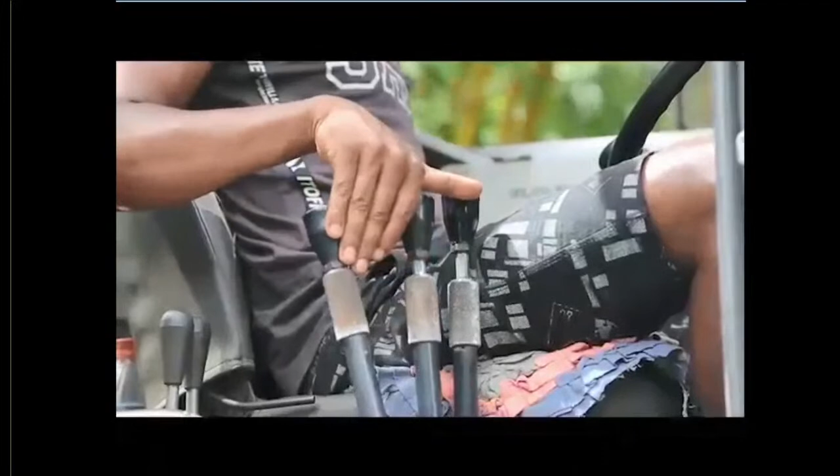This is the concept brought by the Podujana engineers to build a smaller bridge. You will see how the citizens cooperate when they are doing this. When you try to build a bridge you get so many complaints coming from the surrounding people, but these people are very helpful. They are really waiting for the completion of the bridge. These are some of the initial bridges we did.

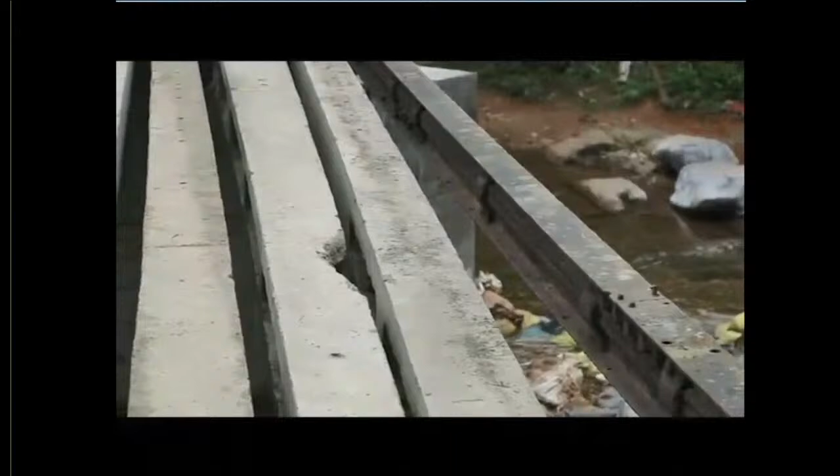So this is the proposal that we carried forward to the government of Sri Lanka. The government of Sri Lanka very happily accepted this idea. But we can only go up to about 200 bridges with this kind of element. Hereafter we should go for a different kind of design.

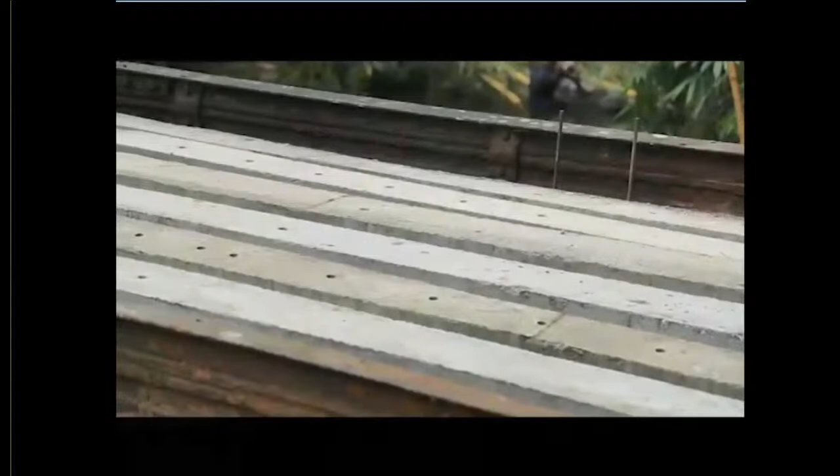It must be easy, convenient, and we don't have many access issues. Maybe modular construction, maybe high performance concrete, we have to have a different scheme. I was happy to be a part of the opening ceremony. This is where this concept was started, so that is the concept that we have developed. Now we are trying to build at least 2,000 bridges this year.

You can see how happy villagers are. Every village that you see, they are very happy to accept this kind of solution, that is one of the main requirements that they have. So I'll go to the next slide then.

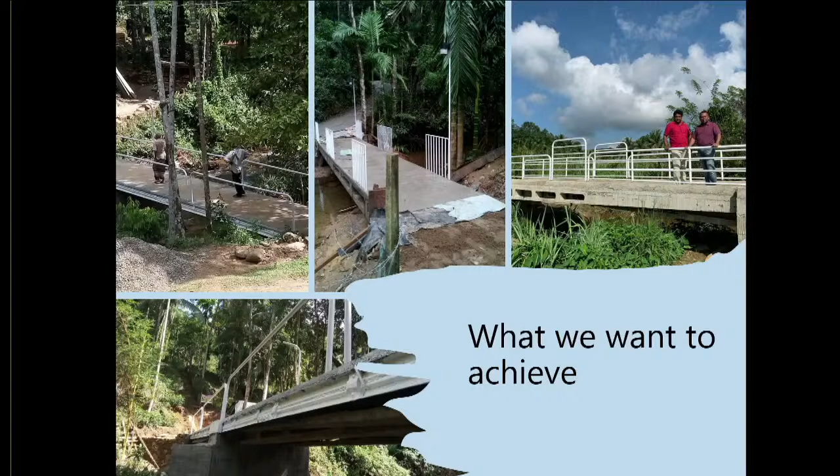So what we wanted to achieve is as much as possible a cheaper, sustainable solution for the business. We engineers always try, without breaking the borders, to apply sustainable solutions to the people who actually need them. So this is what we are trying to do here.

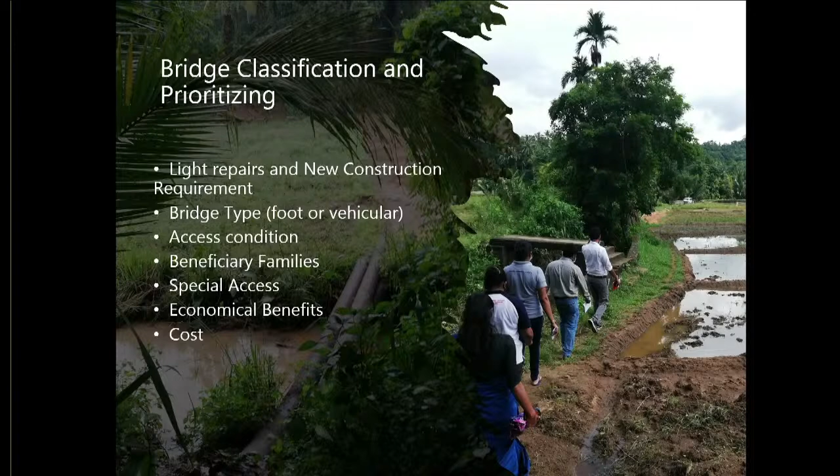In order to start this, we thought we need a mechanism, we need the science there. So we hired consultants from the university and asked them to visit all these places and find the beneficiary families, which is very important, and the economical benefit, which is also important, because we need a return on the investment from the government.

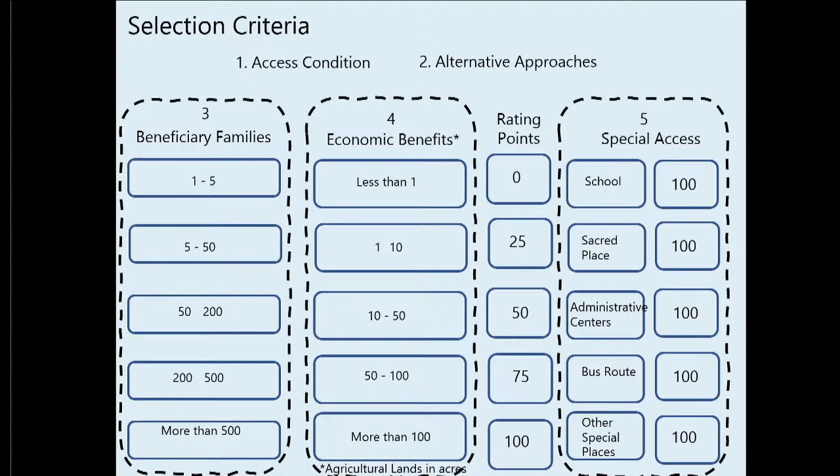Then where special access is required, along with a few other criteria, we come up with new bridges where bridge repairs are needed, and there are some steel bridges abandoned. These places, bridges can be taken away to a different location and another built. Sometimes when you take one bridge away, we can have 6 rural bridges instead. Likewise, different types are there: culvert type, culvert box type, culvert deck type, different types of bridges.

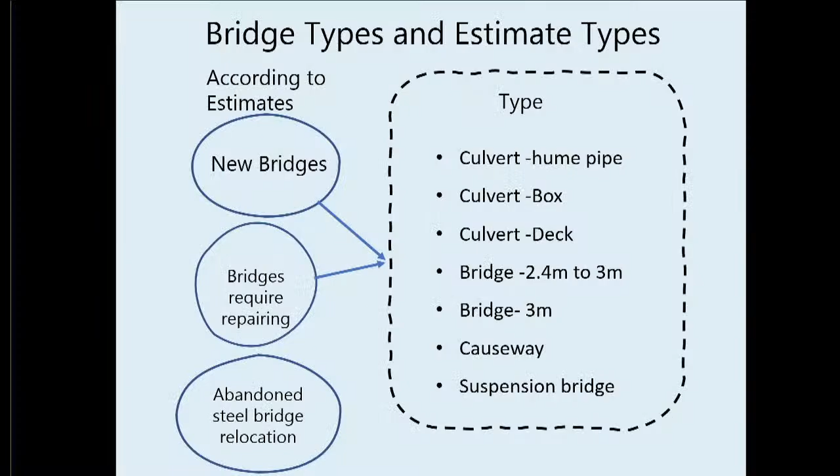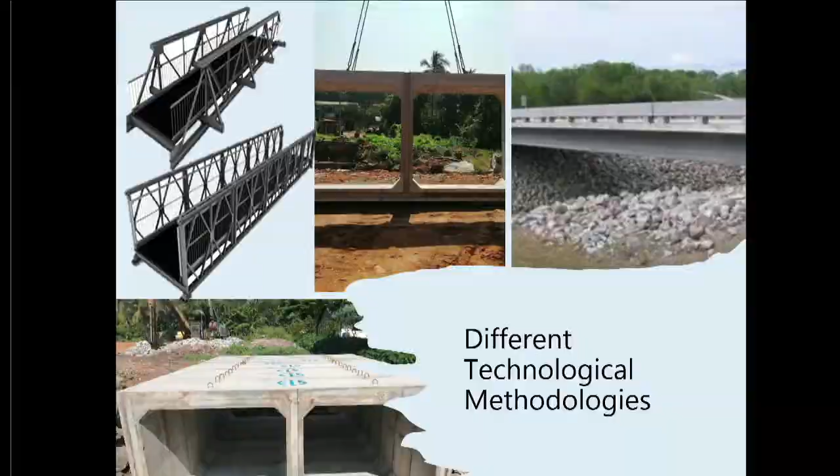So for the time being, we are trying to bring new technology, maybe modular construction, steel, precast units, high performance concrete, and so forth. As well as I mentioned before, we are trying to move all the steel bridges to new locations.

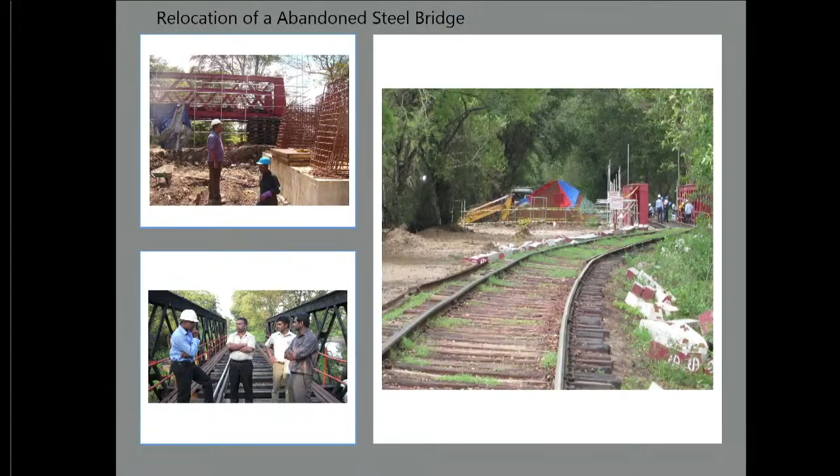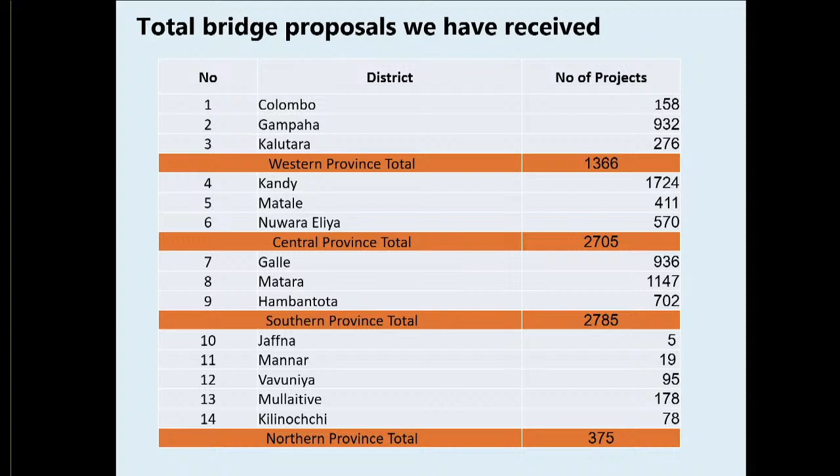For the time being, these are the numbers of bridges that we have received across different provinces and districts and so forth. 13,214 bridges, but we are still receiving more.

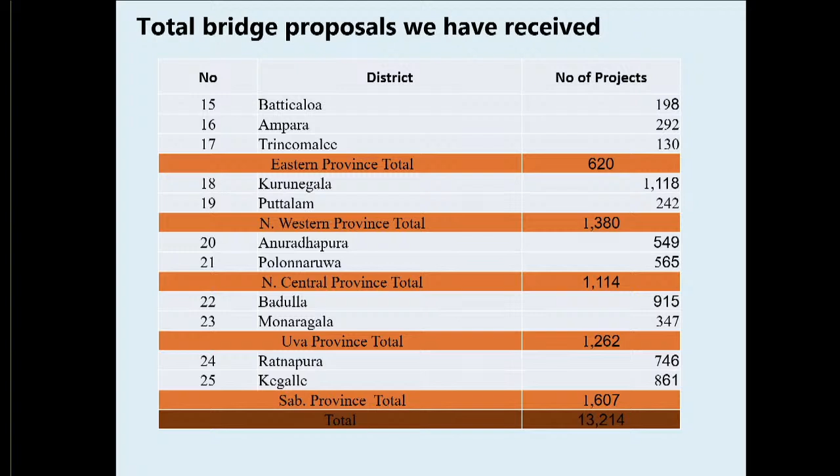So these are when you go province wise. You know that when you go to eastern and northern areas, there is not much river, so there are fewer bridge locations. You can understand that in hilly areas, bridges are more needed, and you get more requests.

So for the inspection study, all the proposals are surveyed and inspected by the University of Peradeniya in a followed manner. Proposal details are sent to the university from our ministry. Proposal sorting was done, connecting with the relevant local authorities, and site visits and inspections, bridge sorting for prioritization, documenting, and presenting to our ministry.

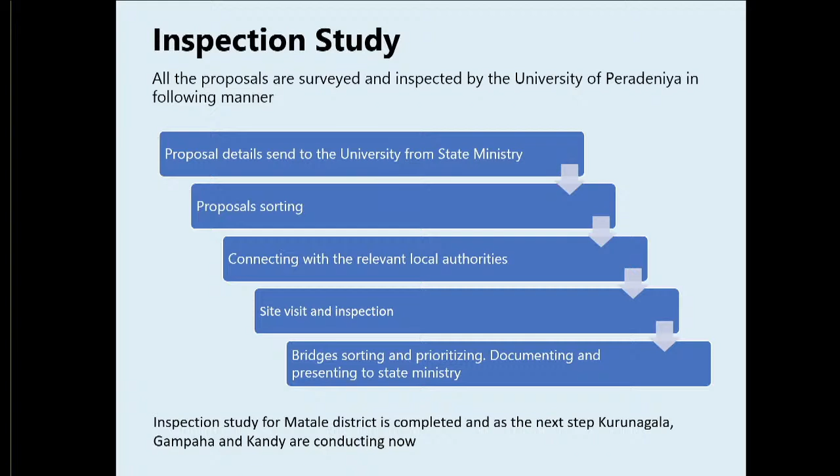The inspection study first started at Matale, because now we also do Kurunegala, Gampaha and Kandy. These are some of the results. What you see in green is immediate importance, then yellow is next, and so forth. There are some locations where, when we checked, they just sent a request for a bridge for one house, and having already a road, they still wanted a bridge close to their home.

So this kind of thing, of course, we can do, but not at the beginning. Later we can do it.

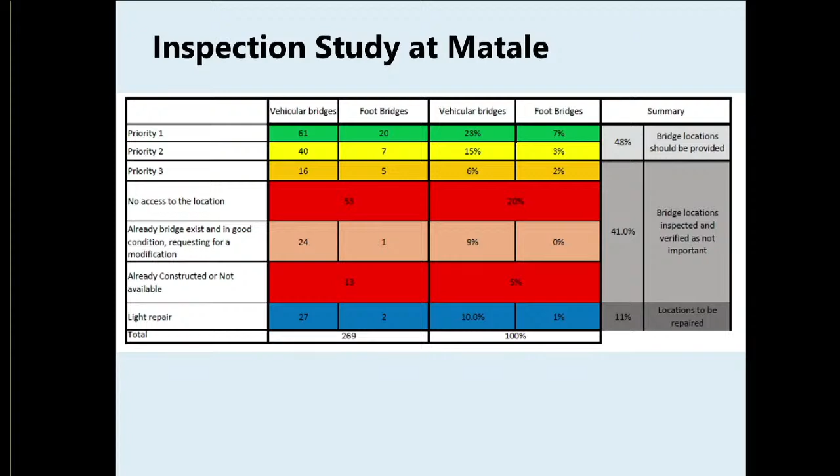Knowing this much number of bridges are to be designed and constructed, we thought of going for a rapid design method. So that rapid design method was formulated. I should thank engineer Weerakoon and his team, he's the person who came up with this.

We trained almost all the RD engineers at the province level, and went up to the province level and trained them thoroughly. This is basically the bridge design and estimation methodology. We can categorize it, but I'm not going into the details.

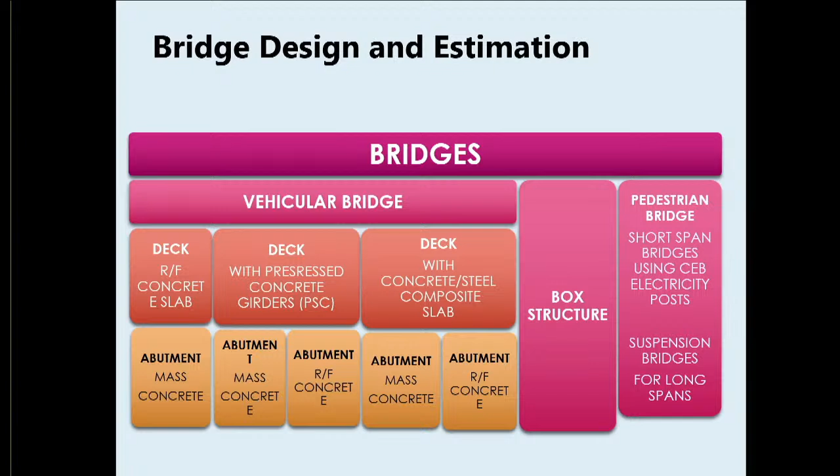So this is the way we have a rapid design solution for any given bridge location. A very comprehensive proposal was established. Now we are around this area, designing the bridges, and estimation is done, and hopefully next month we will be starting the construction.

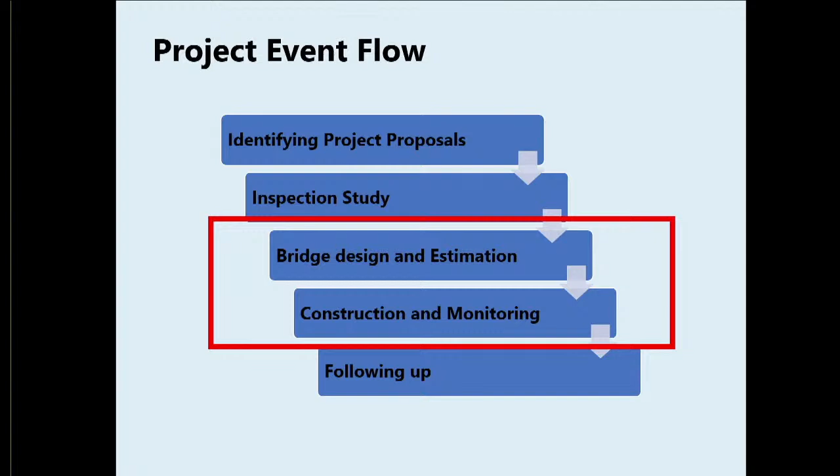With that, I would like to say thank you again for being here with us, and I do hope we will be able to connect this location and give the benefit to the common man. That is our requirement, we need to have the scientific methodology.

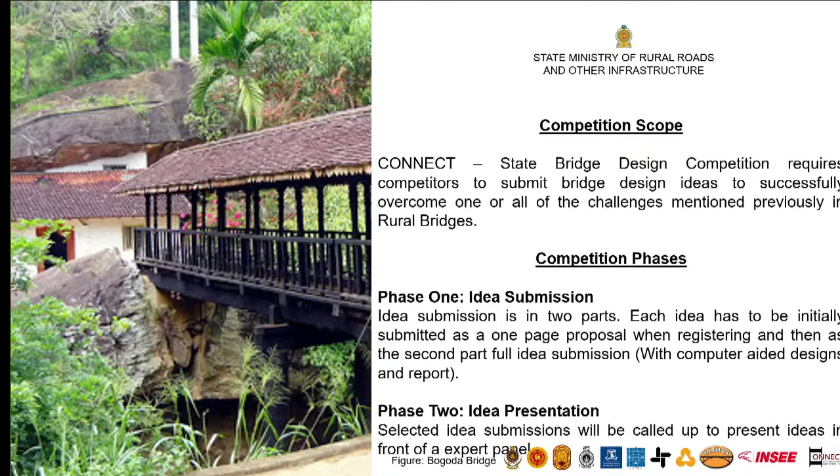We are conducting the competition in 2 phases. Phase 1 is the idea submission phase, starting with the registration process, and after 1 week the competitors have 1 month to complete the design report with structural designs, BOQ estimates, and finally submit the designs. Phase 2 is the idea presentation, where the selected competitors will be called upon to present their ideas.

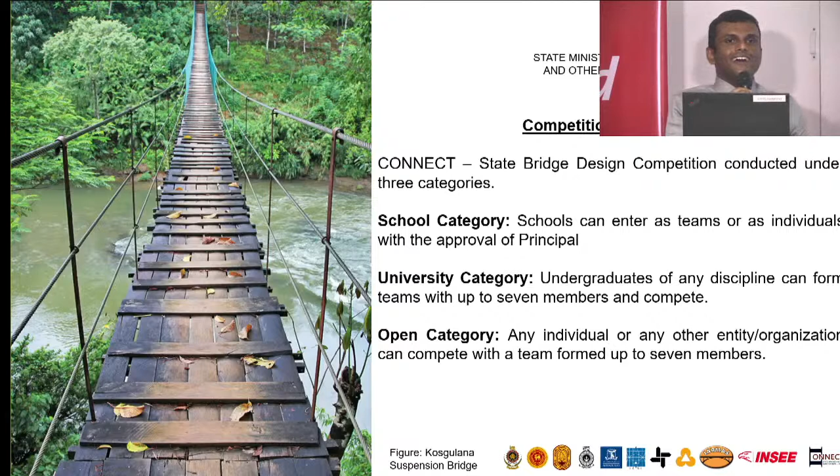We will be conducting the competition in 3 categories: the school category, where schools can enter as a team or individually with the approval of the principal; the university category, where passionate undergraduates in bridge design technology are warmly welcome to be part of the competition; and the open category, where we are looking forward to proposals and idea presentations from passionate engineers in the industry to further enhance rural bridge development, as well as from various organizations and entities in the design sector.

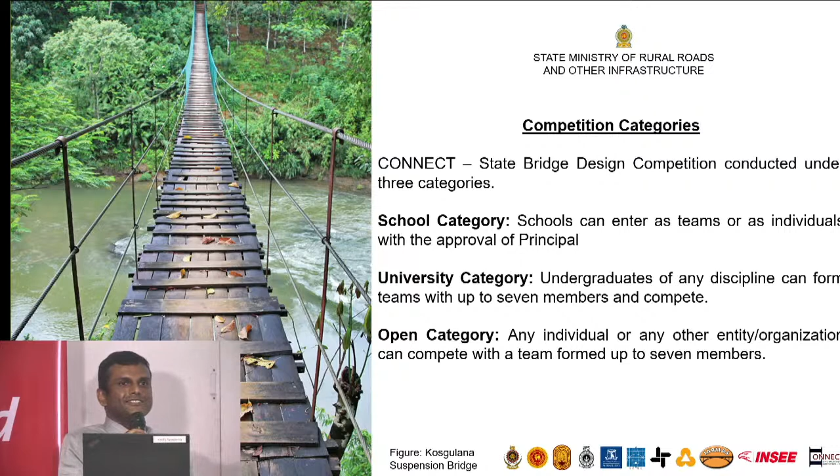The submission requirements in the school category are, at minimum, a conceptual design of the bridge, because as in the previous video where school children were passing through a stream, they may have a visualization of what bridge type they want in that place, so we are looking forward to that visualization from them. But from the university and open categories, the minimum submissions are a computer-aided model and a comprehensive report with technical details. We are encouraging competitors to include any further items and be innovative.

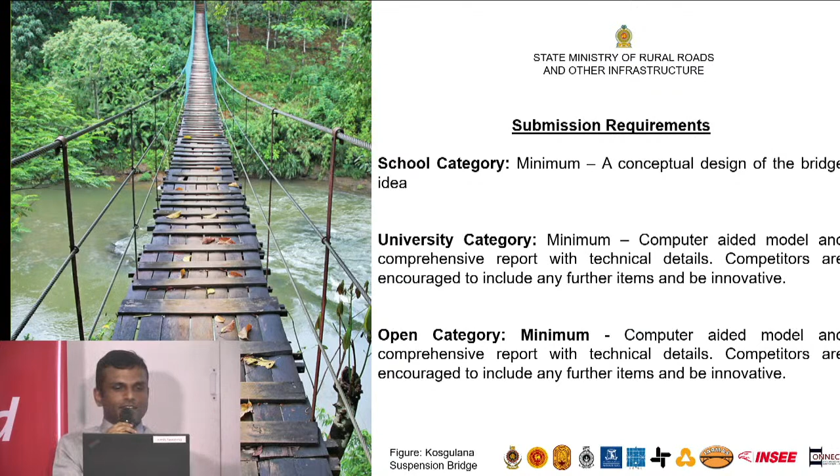The awards are meant to encourage and motivate competitors to enter the competition. For the school category, we have 3 monetary prizes, as well as for the open and university categories. We should appreciate our sponsors in this manner. Other than these monetary prizes, these ideas will be materialized. We as a ministry have a target of achieving 2,000 bridges in 2021, so whatever the idea may be, if it is viable and practical, we would like to take it into practice, as well as grant research opportunities for the exceptional idea holders.

This is the competition event flow. We have the appointment of the expert panel, with expert panelists from University of Moratuwa, University of Peradeniya, University of Ruhuna, as well as the Open University of Sri Lanka. With their help, we developed the guideline for the competition.

Today we have the launching of the competition and the registration opening. Then we'll have a public info session as a knowledge sharing session, followed by idea submissions and review. Then another knowledge sharing session and idea presentations, and finally the idea awards.

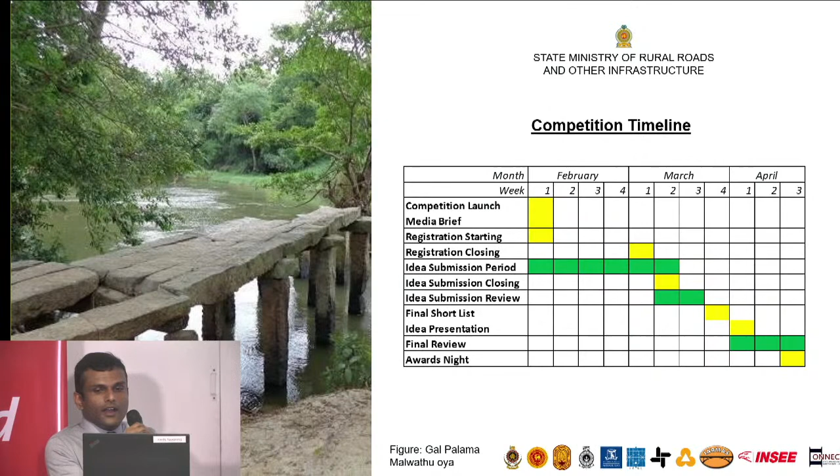I would conclude my remarks with the benefits from the Connect competition. We want to fast forward and successfully complete the Rural Bridge Development Program. We believe the Connect competition ideas will effectively enhance our capabilities in achieving our targets in developing rural bridges. And also, this will be a sustainable platform.

We want Connect 2022, 2023, 2030, and we want this to be a sustainable platform for all researchers. We want to take university level research practices into the practical industry aspects, as well as receive knowledge sharing from all public and industry stakeholders. Finally, we believe Connect will be a remarkable milestone in the rural economic connecting of Sri Lanka.

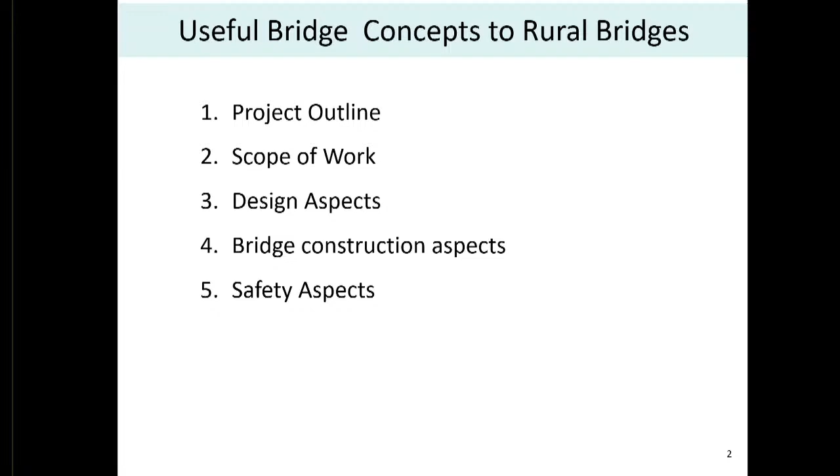My presentation has 30 slides, and this is the outline. I will first go to the history of the New Kalani Bridge project and the design aspects we developed for that project, as well as the steps we took during construction, especially to keep cost and time on track, and lastly, safety aspects.

The CKE opened in 2013, and there was huge demand from the CKE to the existing bridge. Then there was a requirement for RDA as the client to go for a new bridge. So this is a gateway for other projects, especially since it connects to the port city as well as the outer circular highway.

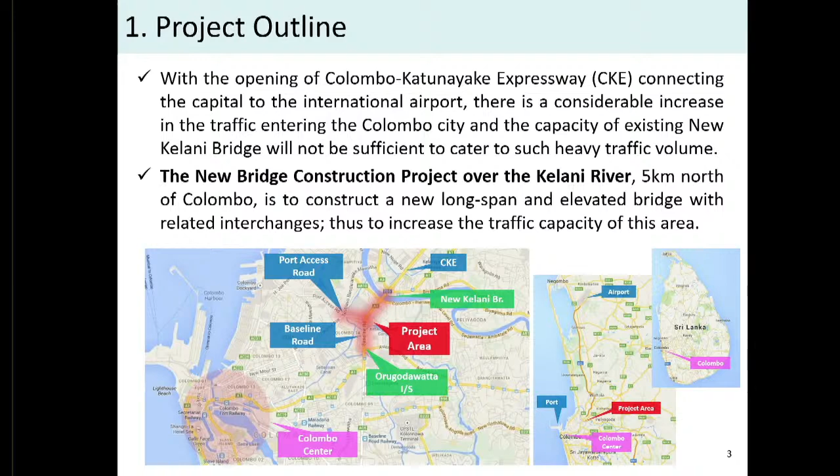This project comprises two packages. Package 2 links to the CKE and goes over the existing river, where we are providing an extradosed 6-lane bridge. Then it connects to the Baseline Road. It goes on one side to Ingurukade and on the other side to Orugodawatta junction.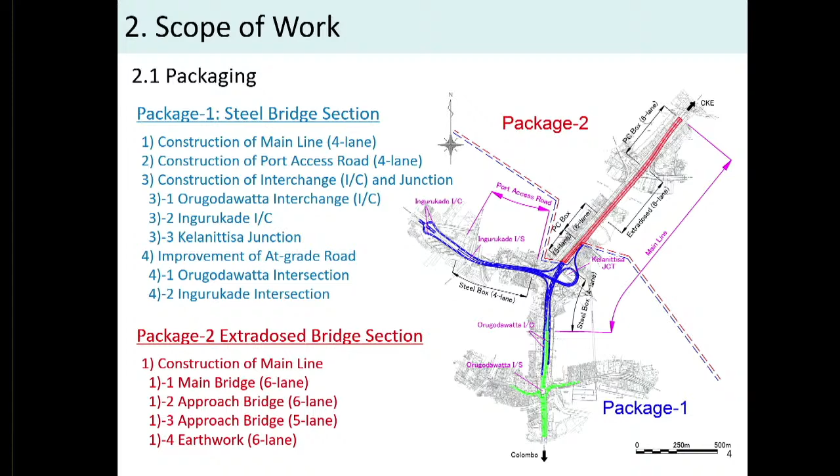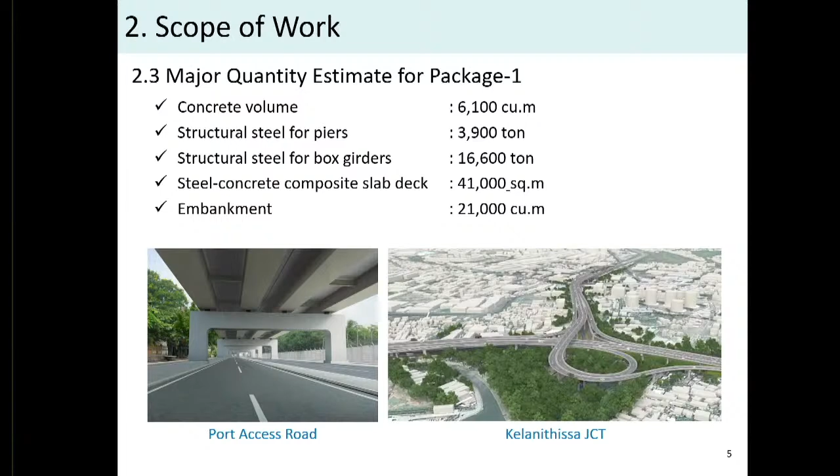So this is a mega project, and the quantities are like that. I am responsible for Package 2, where the extradosed river bridge is located.

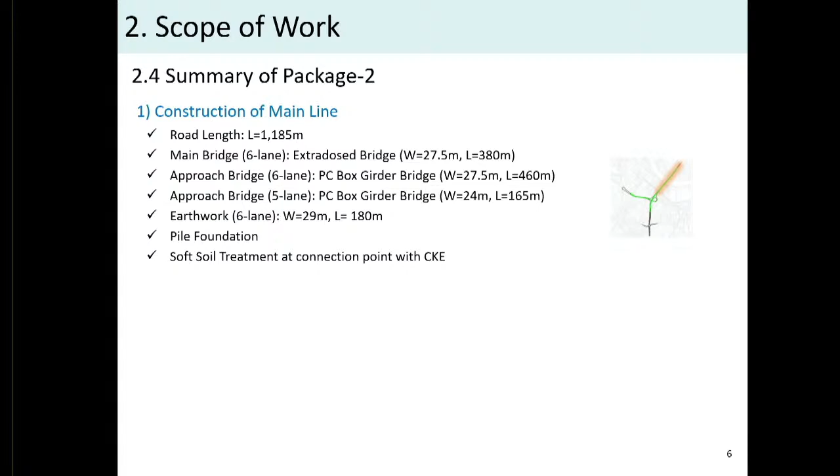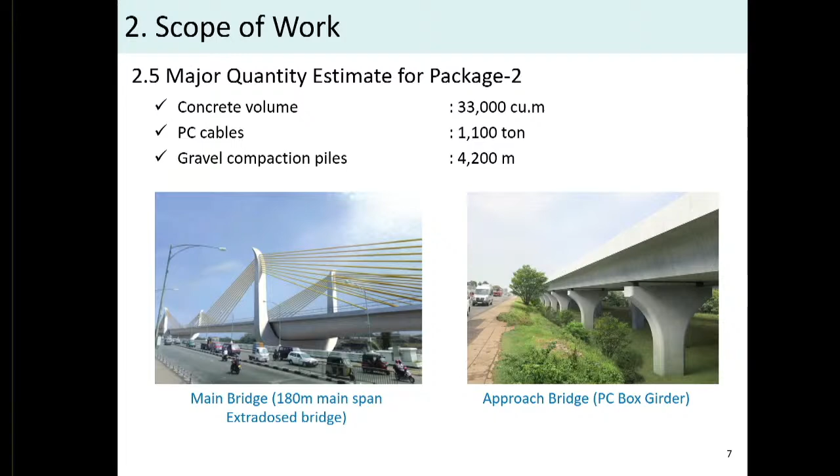You can see that the alignment is on the first sector, going far from the existing road so that construction is not affected by existing traffic. Whenever the alignment is over the existing road, steel was selected as the material because of construction ease and to minimize the obstacle to existing traffic.

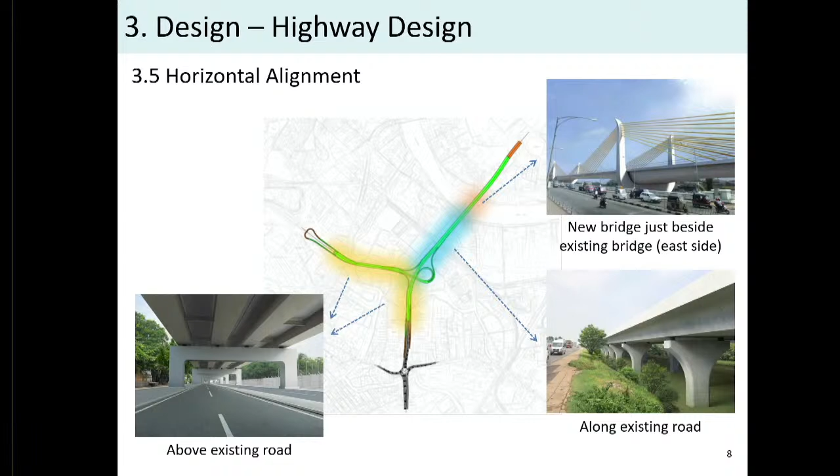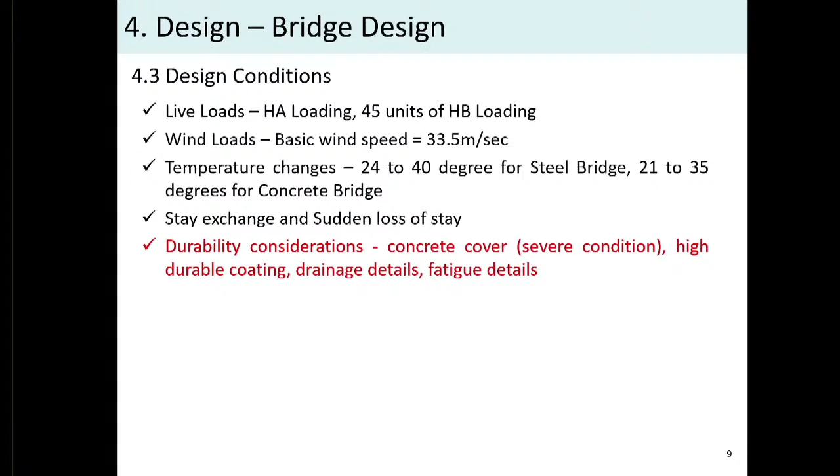These are the design conditions when we are doing the design. I'd like to draw your attention to durability considerations, which will be useful for rural bridges also, because the concrete cover should depend on the environment or situation it faces. For this bridge, we used high strength concrete: 50 megapascals for the superstructure and 40 for the substructure. In rural bridge cases, sometimes it might be a marine or otherwise severe situation, so it's better to use correct concrete with the correct cover.

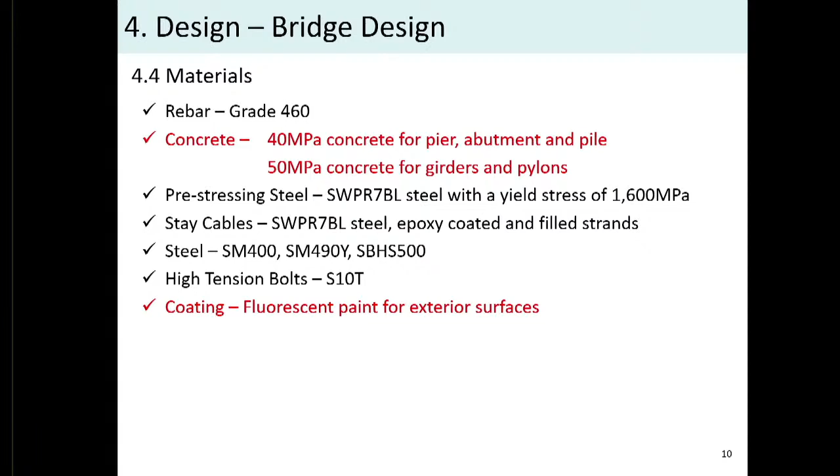In design, the Japanese consultant measured the river width, which was 150 meters, and that's why they selected pylon construction on either side, apart from the abutments, 180 meters apart, so there is no obstacle to river flow.

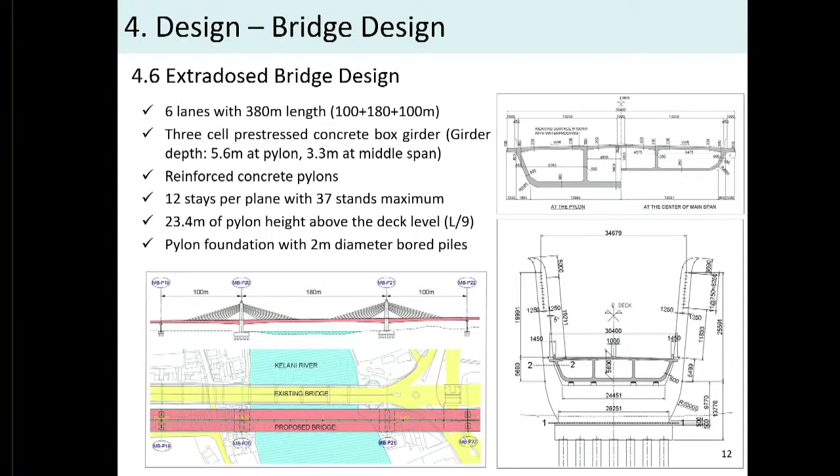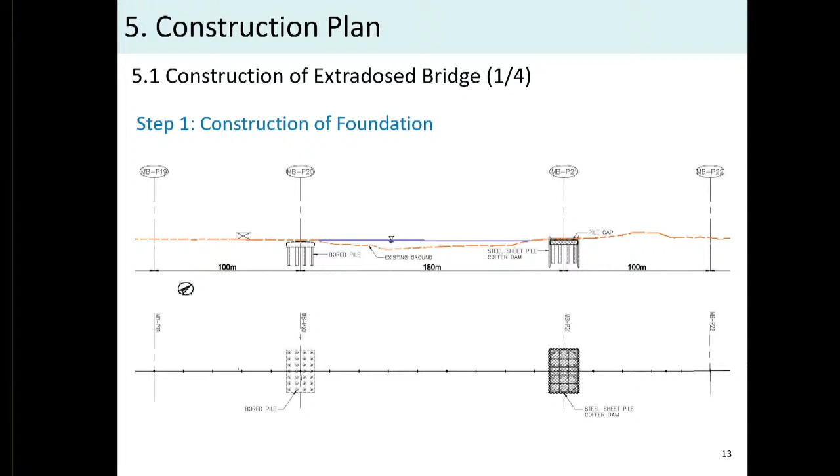It was very important on such a bridge to work with the stakeholder, the irrigation department, because the Kelani River floods at least once every year. You can see the profile of the existing riverbed, and in the design we provided about a 5 meter gap from the high flood level, so this will be safer when there is a flood in Colombo.

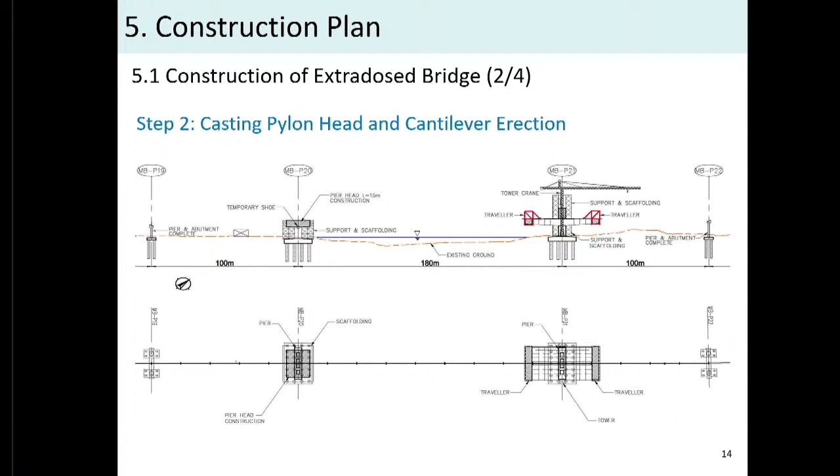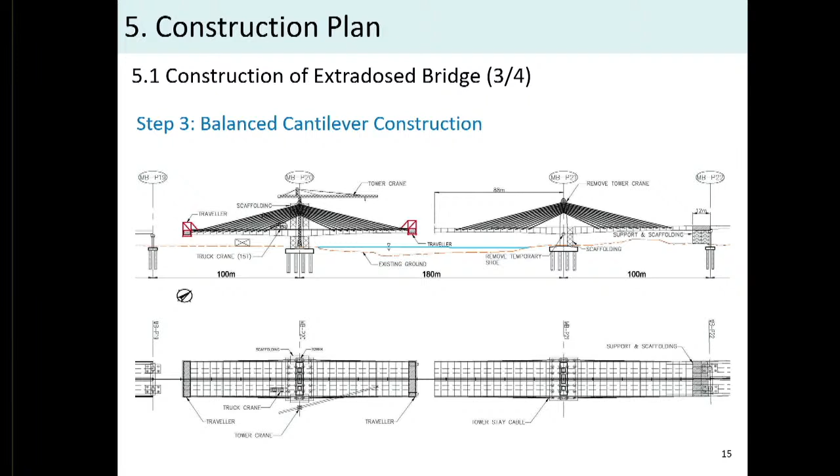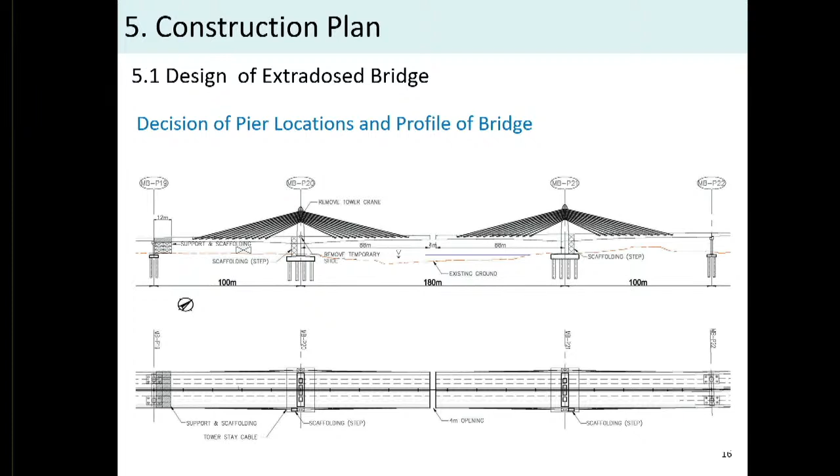One important factor is that we provided riprap protection for the abutment. We adopted this at the request of the irrigation department, so that on one side we give protection to our structure. You can see that when the pylon is under construction, the protection is already provided.

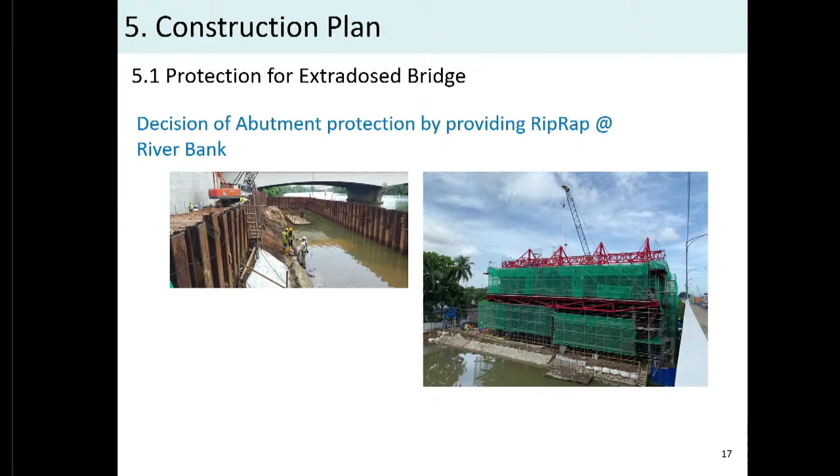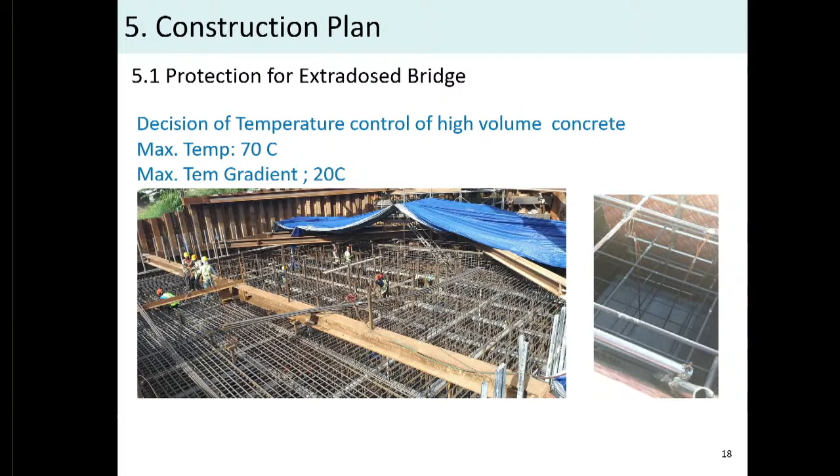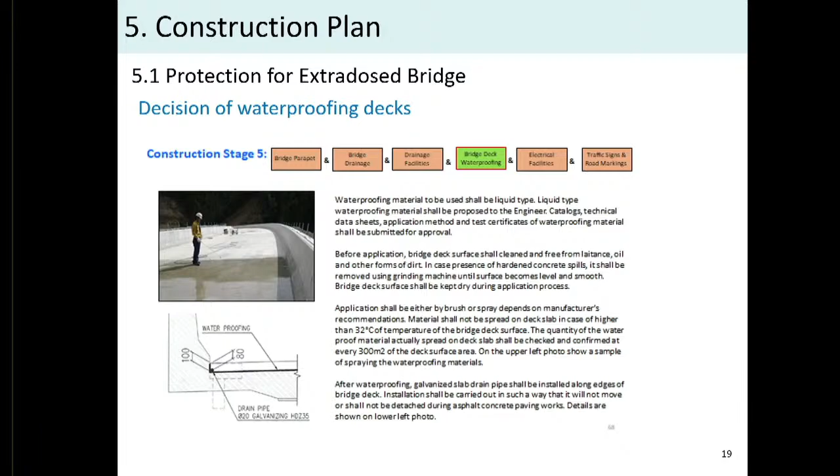Liquid type waterproofing—we have marked two types. One is a sealant type, and in Sri Lanka we commonly use the polymer modified bitumen type. It can easily be applied with a roller. So this is a good protection method for rural bridges.

During the construction, we give figures subject-wise in the schedule. This is the Japanese way - you can see the substructure and all steps of the structure on the Gantt chart, so anybody can monitor progress even without engineering knowledge, and it is easy to reference.

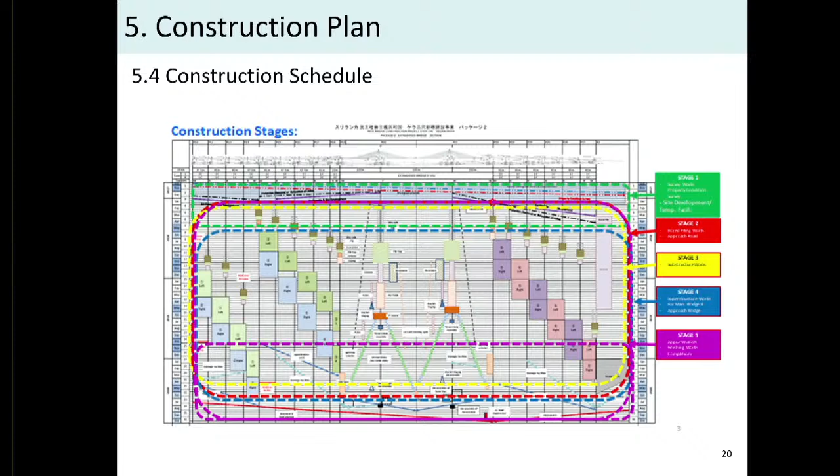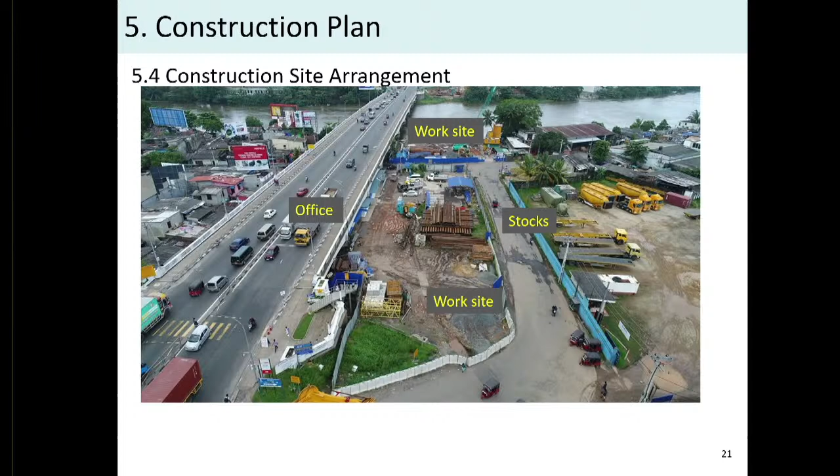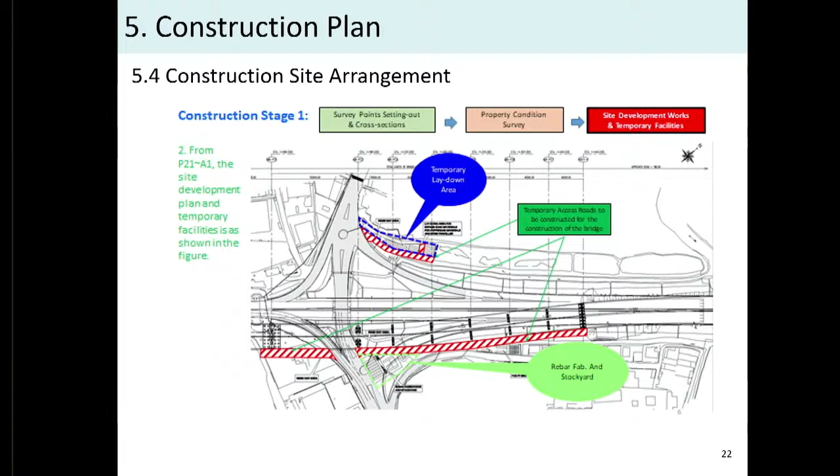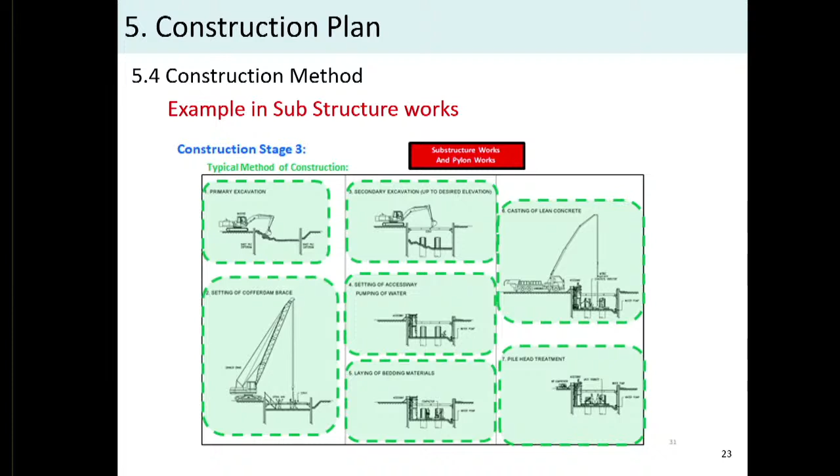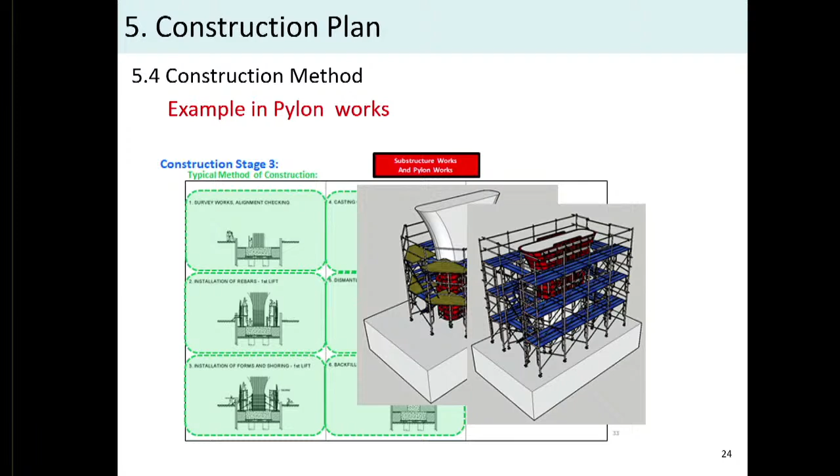In construction, the Japanese way breaks down every activity, defining each sub-activity for planning. For example, for the pylon work, they use lifts, and they maintain temperature, safety, and everything critical on site.

During construction, there might be changes even in any bridge. In the original contract, it was gravel compaction for the embankment where the CKE connects. But we saw several houses around that compaction area, so we changed it as a value engineering proposal to normal PVD, which involved less compaction, less vibration, and quicker construction.

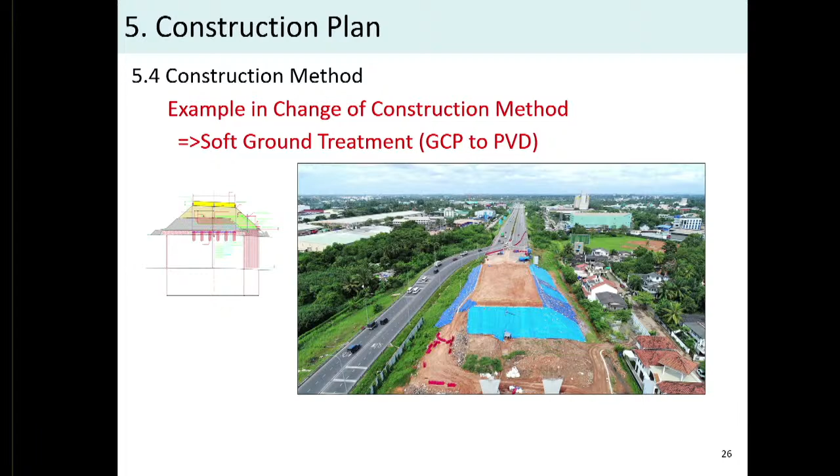Even for rural bridges, traffic management plans are very important. If you use a new alignment, there's no problem, but if you use the same road, more public complaints will come. For example, they realigned the entrance to Nawaloka, where the alignment was changed and the level of the road was also lowered.

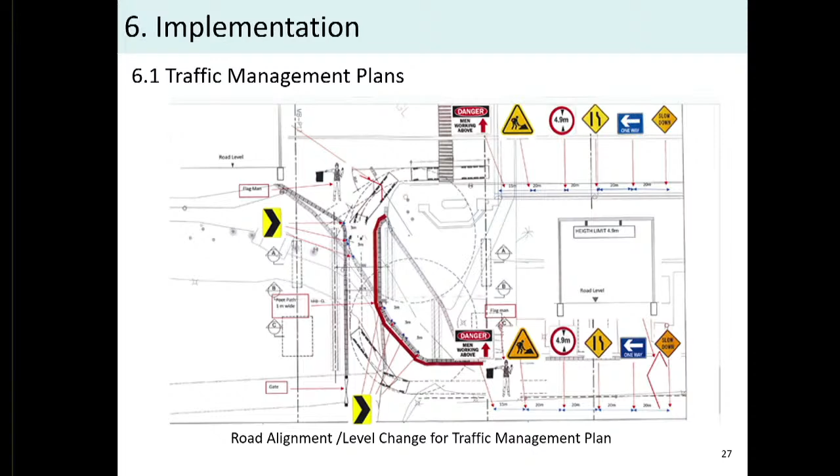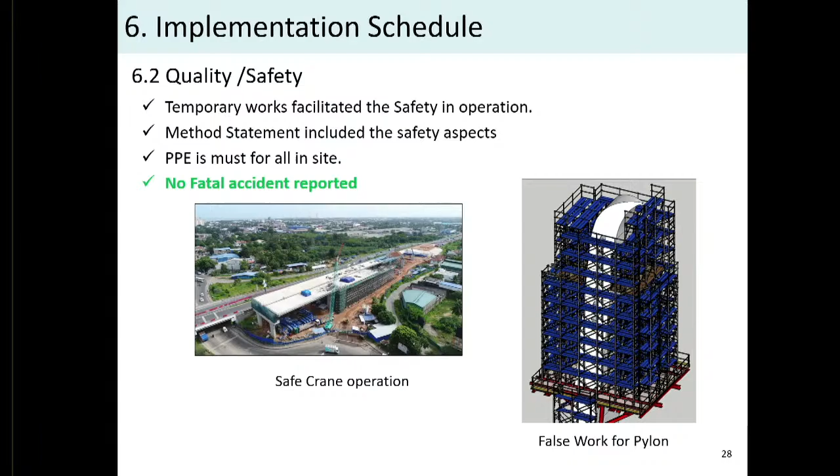The Japanese give high priority to quality and safety. Most crane operations are strictly defined within borders, and when construction goes higher, workman safety also gets special attention.

So this is the end of my presentation. Thank you.